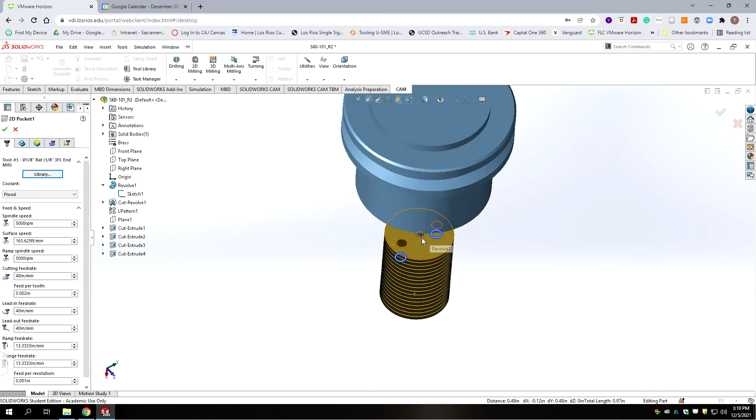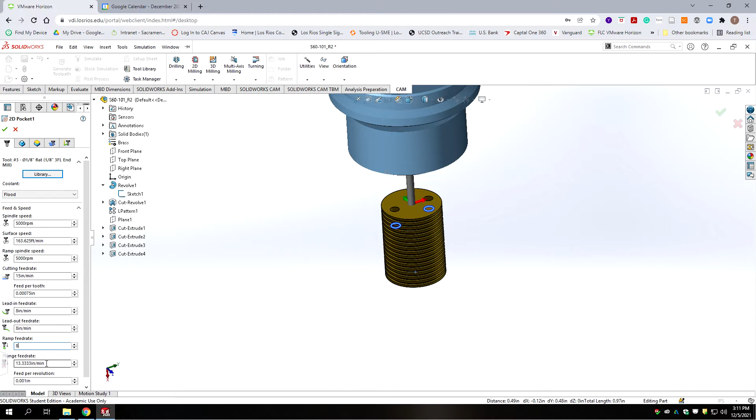Okay, the feed rate is too high. We're going to go 15 inches a minute, and then we're going to go half that on the other one. So we're going to go 8, 8, 8, and 8. We're going to go to the next.

So we want to select the bottoms of the holes. That way we can use the model to drive the programming instead of putting in a typed in value. There we go, so we've got selections. If they're two different depths, without doing that, we would get a resultant that they're the same depth.

So we're going to go to the heights tab. We're going to leave most of this at default. We want to go from model top to the contours that are selected. If we went to selection, it would just choose one of them.

Okay, we're going to go to the next tab. We have wear compensation. Some of these boxes do not appear until you check that you want finish passes. So we want a finish pass. We want one of them, at a 5 thousandths step.

We want to lead in on our finish passes. We're going to do our finish pass at 10 inches a minute. It's going to be a little bit slower than the milling feed.

Okay, we're going to go with multiple depths. We're going to do 30 thousandths per depth, with one finish pass at the bottom. That finish pass is going to be 5 thousandths.

We are going to use even stepdowns. We're not going to check the box that says only finish at final depth, because we want it to do a rough cut with each one here in brass. That way we're removing all the material that could smash against the sides. We're going to go in order by depth, so it's, I think, going to do the shallowest one first.

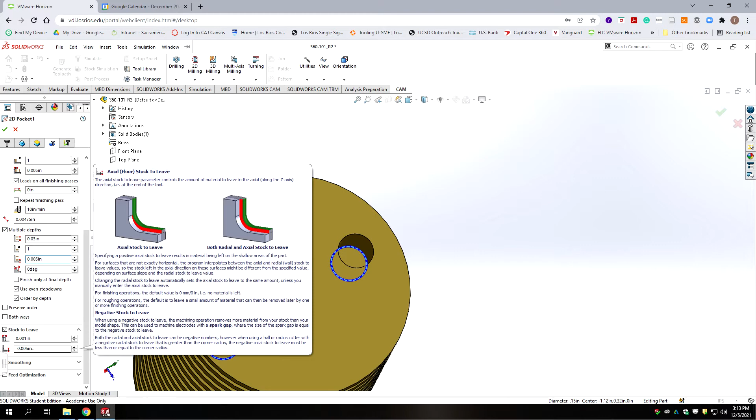And then we're going to leave stock because we want to leave some stock for the reamer to remove. So we're going to leave 1 thousandth per side, and then we're going to go negative 5 thousandths deeper. Now we have a 5 thousandths tolerance, but that is for the hole at full diameter depth. So we can go a little bit deeper and fudge that a little bit. Shouldn't affect anything. Then we're going to go to the next tab.

We're going to allow rapid retract. We're not going to keep the tool down because there's only 2 holes. Our lead in, it's going to have a 0 radius at 90 degrees, and then we're going to have only a 5 thousandths linear lead in.

Okay, because we have very little room for this pocket to fit around in, we don't want a vertical lead in radius, and we want our lead in out to be the same. We're going to change this from helix to plunge, and we're going to set our plunge clearance height at 100 thousandths above the workpiece.

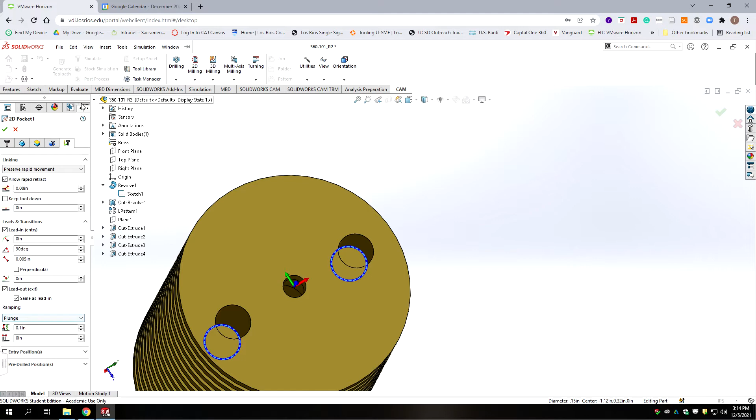Okay, we're going to accept that, and this is the result that you should get. The cutter and scale with the hole is pretty good size, so it's going to cut in a circular pattern, and you'll have a flat bottom. And it does one of the holes before the other based off depth.

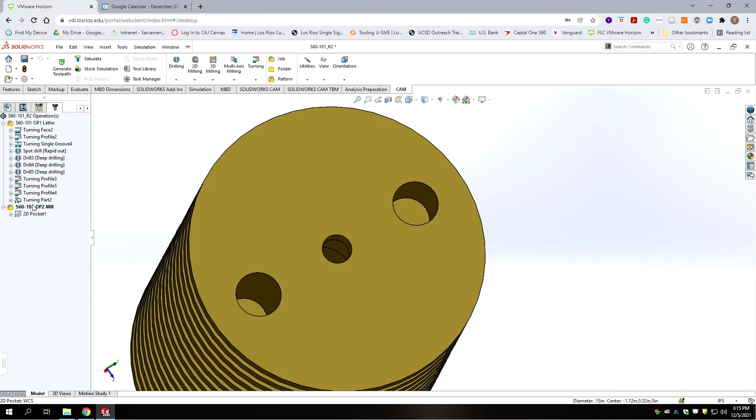Okay, now let's move on to the reaming. So we're going to go drill, and we're going to select from our library, mill tool library, the 154 thousandths reamer.

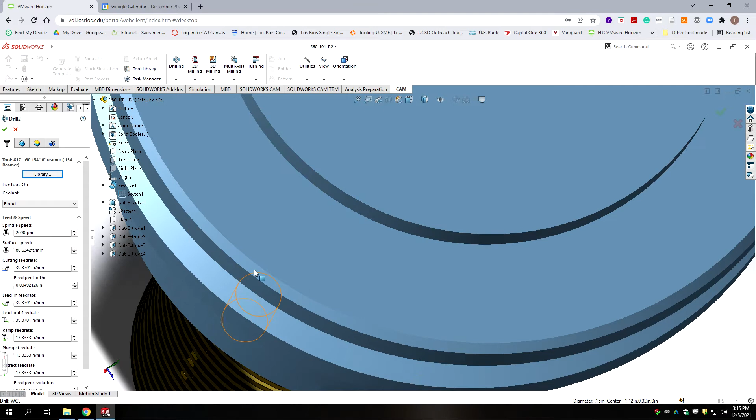Okay, it should be roughly the same, appear the same diameter. Our spindle speed, 2,000 RPM is fine. Our cutting feed rate's way too high though, so we're going to go 10 inches a minute on all of these.

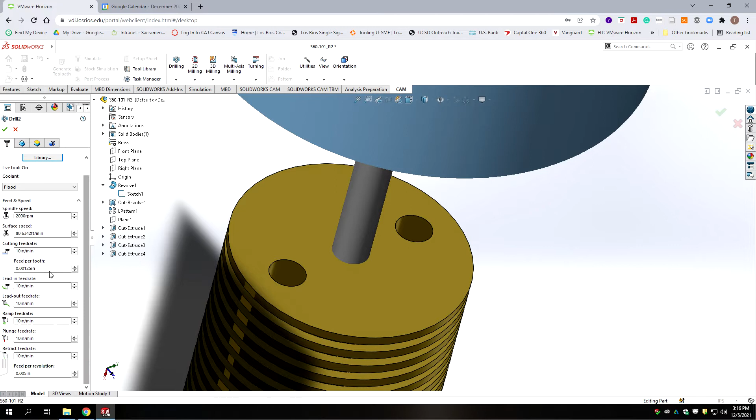Okay, then we're going to go to the next tab. What are we cutting? We're cutting this hole and this hole. We select the sides on those, and we want to do them in order by depth also.

Okay, we're going to go to the next tab. We're going to leave all the heights the way they are at default, and we're going from hole top to hole bottom. We're not drilling through the tip, there's no tip on a reamer, and we can go right to the bottom because we cut the pre-hole 5 thousandths deeper.

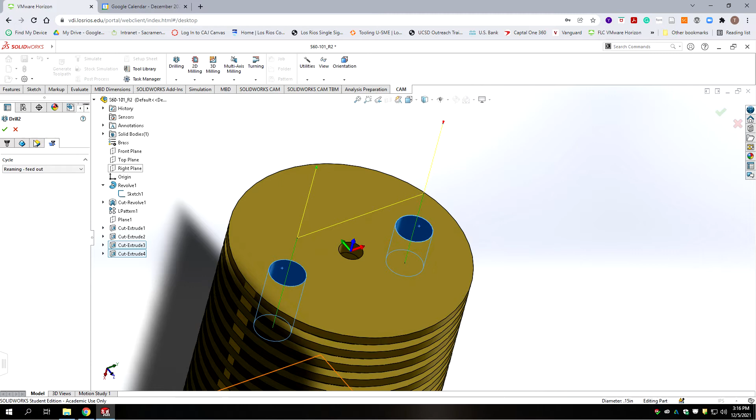And then we're going to recycle. There we go. We're done with the second to last operation for this class. Now let's move on to the last one.

Okay, then the last one, we need to set up our stock. We want X running axial with Z perpendicular to that hole.

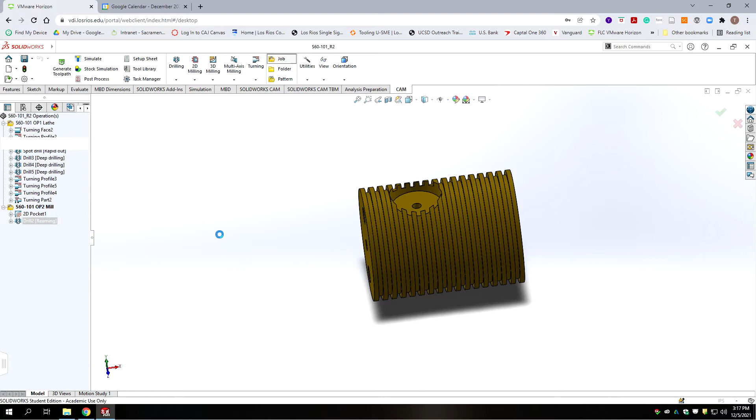So we're going to go to a new job. We're going to do milling, and our comment is going to be S60-101 OP3 Mill.

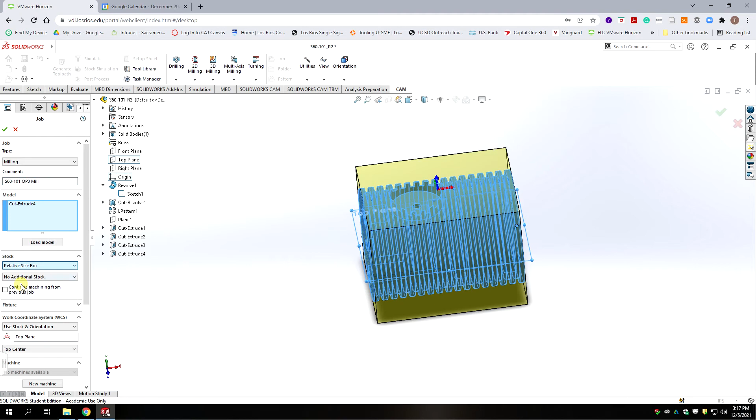Okay, and we're going to do a cylindrical stock. We're going to select our cylinder, which sets the axis of the cylinder.

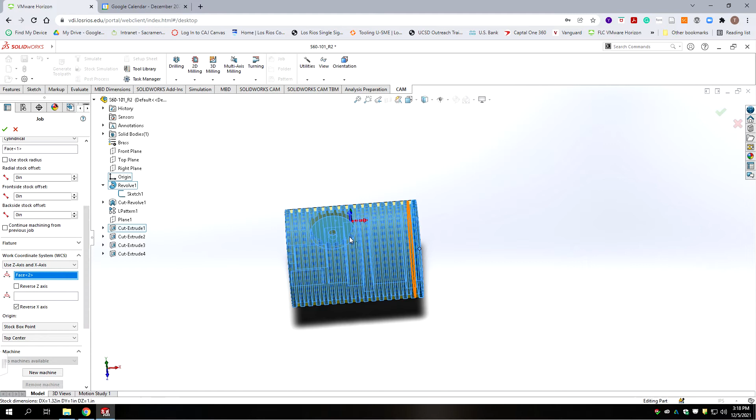We're going to scroll down to our origin. We're going to use the Z-axis and X-axis, picking on the flat of our pocket because we want the spindle oriented 90 degrees to it, and we want to reverse the X-axis so it's pointing to the right. This way you'd be facing it as an operator the way you see it, with a fixture on the left hand side that holds this on the pins and clocks it, so you can see what's machining without the fixture in the way, and you don't have to reach behind the part to manipulate the fixture. Okay, we're going to keep going and select our origin.

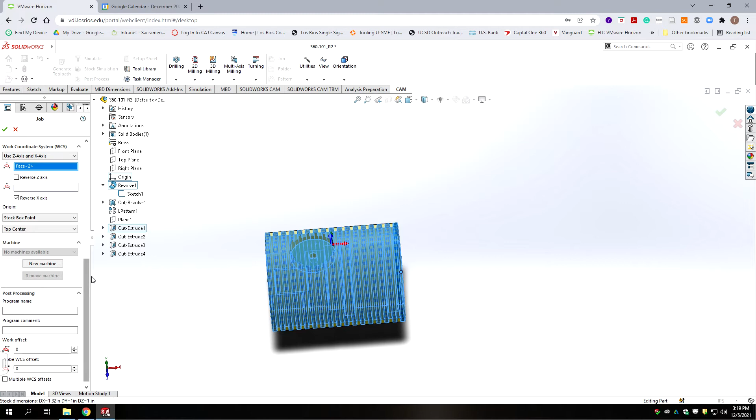Now all our datums radiate from the right side of the part, but we're mounting it on the left side. I'm going to set the origin on the right hand side so we could feasibly edge find or probe the end and find its location. We're going to use model box point, and it's going to be middle side 2, which puts it right on center. So if we were to indicate the center of that in Z height, and then right to left, we'd get an accurate dimension to where this pocket is supposed to be.

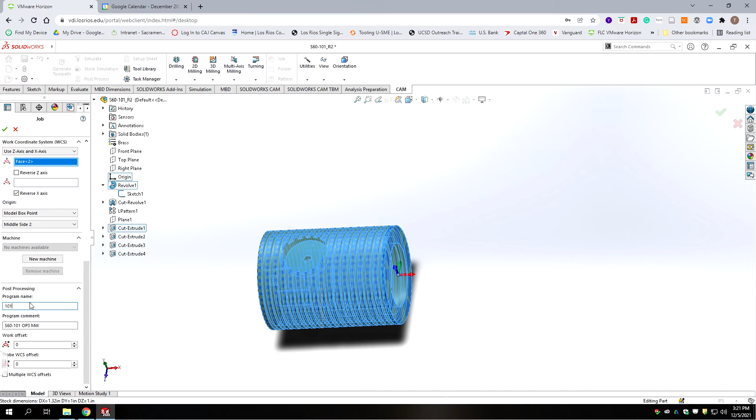Okay, our program name, we're going to go back up. We're going to highlight the name, right click and copy, scroll down for the program comment and paste. Our program number is 1013, and we'll accept that. Let's change the name to S60-101 OP3 Mill.

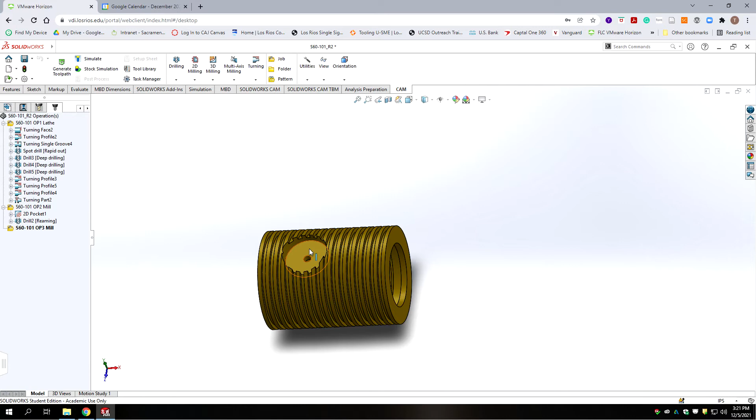So we're going to do a pocket with the 3/8 end mill, and then we're going to drill out the hole. We're going to do a 2D milling, 2D pocket, and it's going to be similar to the ones we did on the side.

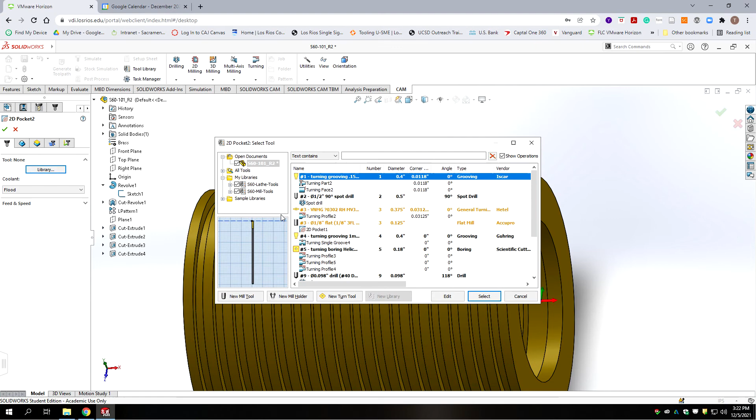Okay, we're going to go to our tool library, go to the mill library, and grab the 3/8 flat end mill, 3 flute. This is the one cutter that can probably go as fast as we've got it set here, but it's a small part and we're going to be moving very small amounts, so let's go 20 inches a minute. We leave the other ones where they're at.

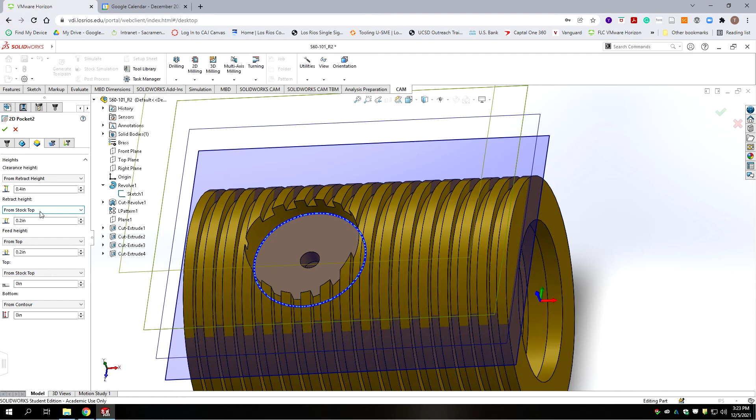We're going to pocket this pocket. On our heights, our retract height is going to be from stock top, our feed height is also going to be from stock top, and we're going to be cutting to the contour.

Okay, we're going to go to the next tab and select finish passes. Once we select that, this wear compensation box opens up. I think a pass of the diameter of the cutter is too much, let's do half the diameter, so 3 divided by 16 -- this is the 3/8 cutter. We want one finished pass. That finished pass right now is set at 30 thousandths, 10% of the rough cut I guess.

And we want lead ins if we can get them. Our finished pass should be at the same or less speed than our rough pass. We don't need to repeat the rough pass on this. We will go with multiple depths -- 40 is fine. Let's go ahead and do one finish pass on the floor, we want that nice and flat. We'll make that finish pass 5 thousandths, and we will finish at final depth.

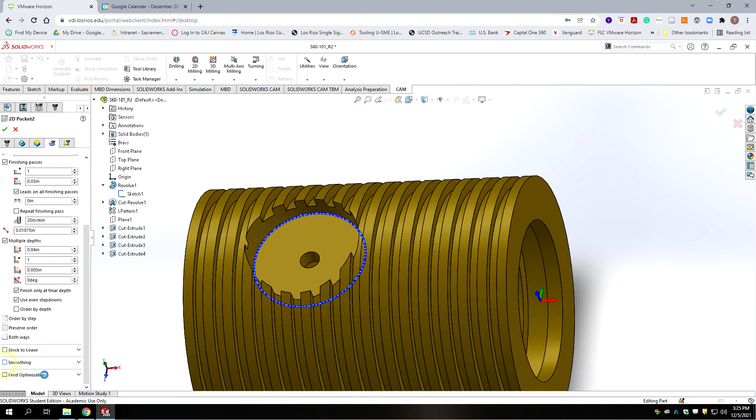We're going to use even stepdowns, and for stock to leave we're going to deselect -- we don't want stock to leave. We do want to turn on smoothing, and the default setting's fine. We're going to set the depths at 0.06. We'll move to the next tab.

Okay, we allow rapid retract, but it's going to be 0.01 clearance instead of the default. Lead in entry, we want 10 thousandths -- there's not a lot of room for this cutter to move around. It's at 90 degrees with a 10 thousandths linear lead in, and we do not want a vertical radius. We're going to set the lead in and out as the same.

We've got our plunge clearance at 100 thousandths -- it's just going to plunge straight in, with 100 thousandths plunge clearance in height and 0 set at side distance. This is a fairly stout cutter, I don't think it'll have any issues there. Okay, now we can accept that. Alright, so we get 1, 2, 3 rough passes and a finish pass at the bottom, taking it to finish sides.

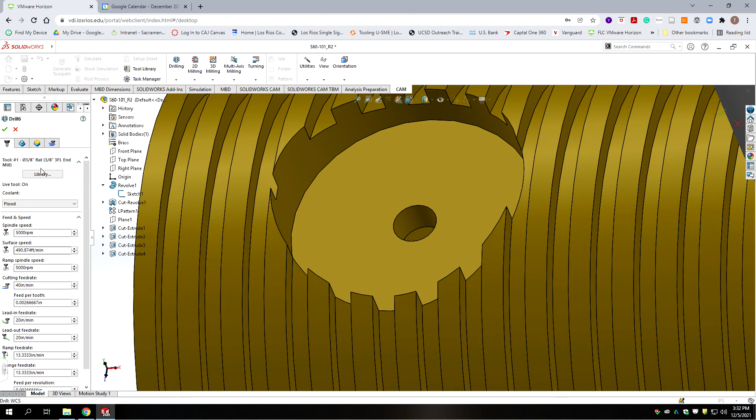Alright, that's the moment you've been waiting for -- the very last operation. So we are going to drill, and we are going to drill with a tool from the mill library. The diameter of that hole on our drawing is 79 thousandths. What do we have that's close to 79 thousandths? There we go, tool number 15, it's a number 47 stub drill. We're going to select that.

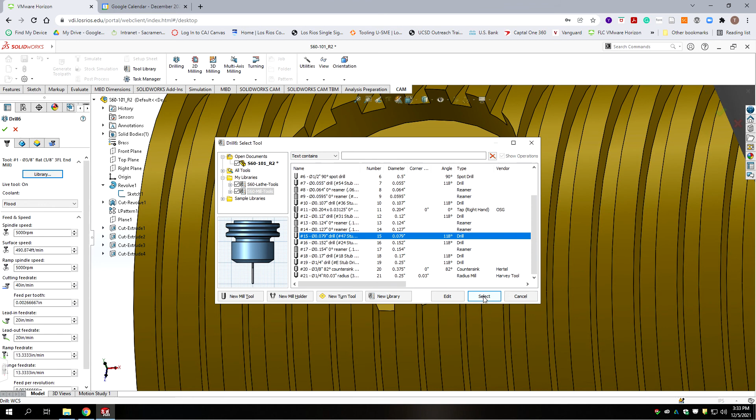We'll leave all that at default. Go to the next tab, we're selecting this hole -- okay, it's a single hole. We're going to the next tab, leave all this at default. Okay, we're going from hole top to hole bottom. We want the drill to punch through, and we want an extra 10 thousandths.

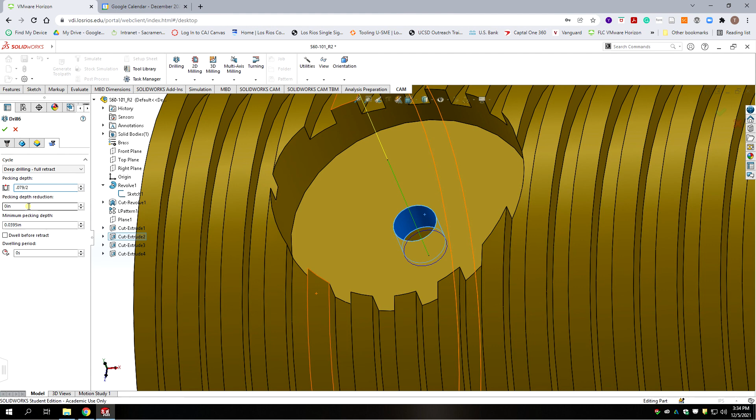Okay, the next tab, we're going to go deep drilling. We're going to go half the diameter, 0.079 divided by 2, and we're going to accept that. Okay, we drilled through the final hole.